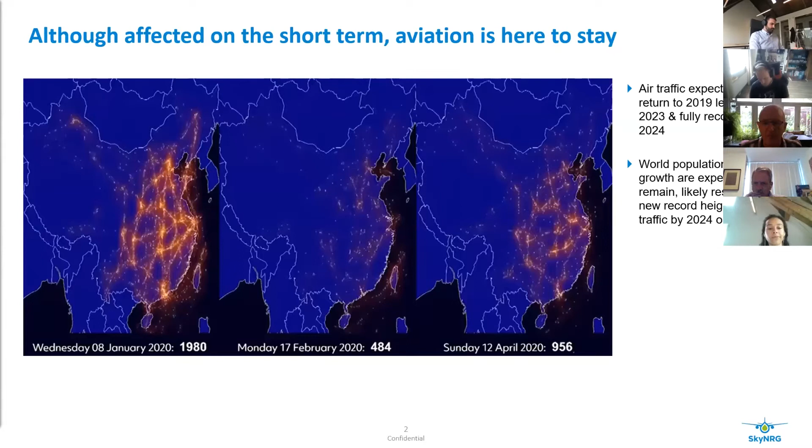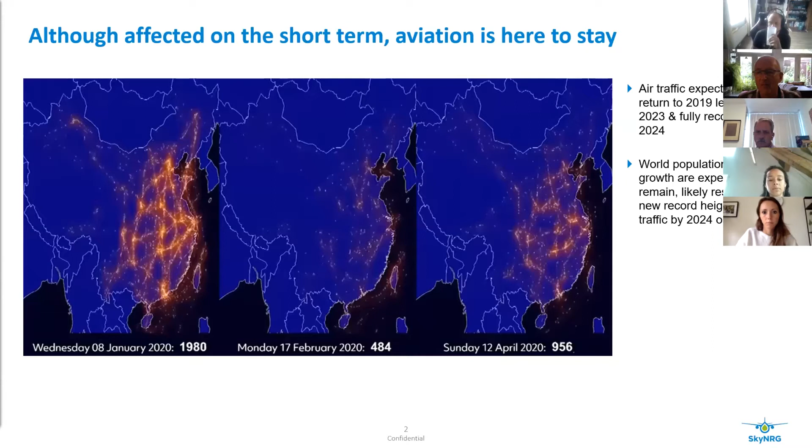Moreover, it's expected that due to the world's population and GDP growth, it will likely result in new record heights in air traffic activity by 2024 and 25. So in other words, yes, aviation is affected in the short term, but it's here to stay in the long term. It is therefore up to us as a society to mitigate those risks of the aviation industry, which is mainly the carbon footprint. Before the COVID outbreak, it was generally known that aviation would continue to grow by 5% per year without timely action, and it would consume 20% of the global carbon budget by 2050.

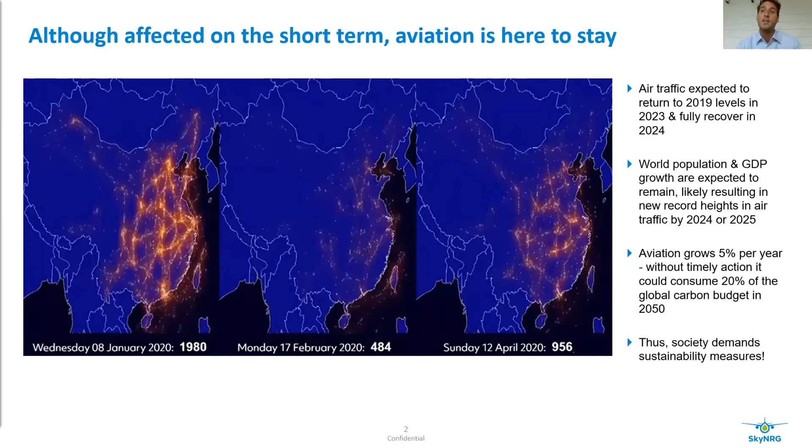To do this, there are several solutions. The first is efficiency improvements, such as newer, more efficient aircraft, but also more efficient air routes. This, however, will reduce total emissions by only 1.5%. It helps, but it's not enough to fully reach the 50% reduction goal. Therefore, it's very important that other solutions, such as sustainable aviation fuel and new technologies, are needed, such as electric flying and hydrogen flying or hybrid.

However, although we as SkyNRG applaud these alternatives because we're in for sustainability, we are also aware that it's not realistic that this will be available on a large commercial scale in the next 20 years.

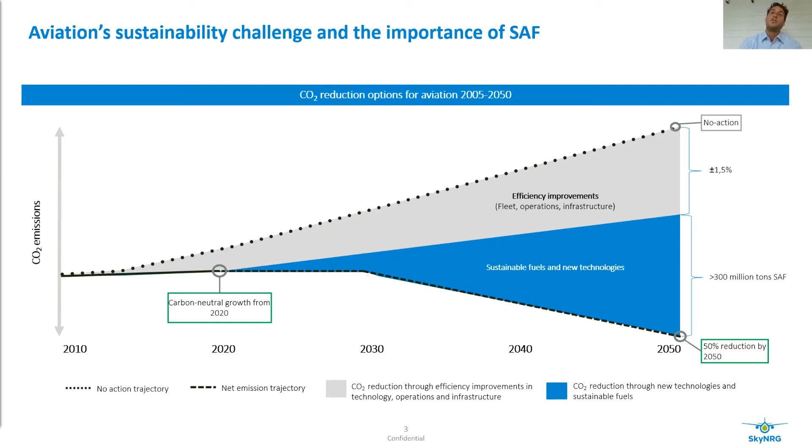So now I've been saying a lot about sustainable aviation fuel till now, but I think it's important, since it's a very important topic, to know what exactly sustainable aviation fuel is. Well, to know what sustainable aviation fuel is, you need to know its enemy, and that's fossil jet.

Fossil jet, in its principle, is taking new hydrocarbons, so that's crude oil, subtracting that from Earth, and emitting new hydrocarbons into the atmosphere.

Sustainable aviation fuel is actually the same, which means that it's a drop-in fuel, such as conventional jet, but the fuel can be used in conventional aircraft. The only difference is that the fuels are made from existing hydrocarbons, such as waste streams, like used cooking oil. These hydrocarbons are recycled, and because of this recycling, this results in an 85% reduction of CO2 emissions, 90% fine particles reduction, and 100% sulfur dioxide reduction.

So two things are important to mention here. First, the feedstock itself is different - instead of crude oil, we use different sustainable feedstocks such as canola oil, used cooking oils, or even municipality waste. The second thing to remember is that the fuel itself is not different. It can be used as a drop-in fuel in conventional aircraft, so the aircraft that exist right now can be used.

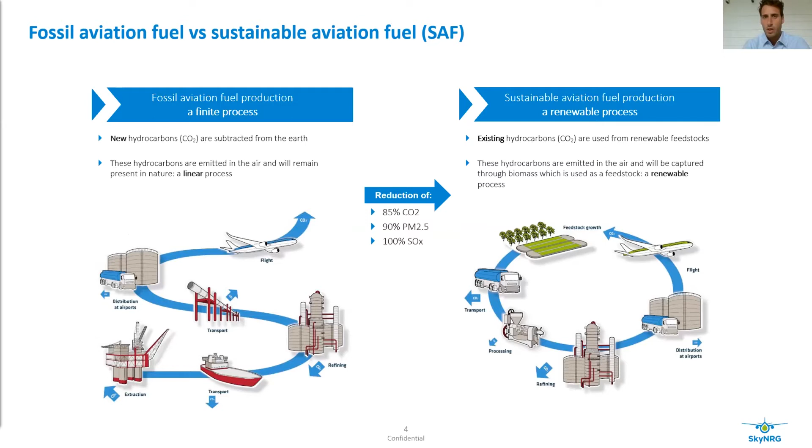So the premium has dropped such that the price today is 2 to 3 times more expensive than conventional fuel, whereas 10 years ago it was 15 times more expensive. So we've been working on that to reduce the premium.

But to reduce the premium, we've also been working on long-term activities - that's creating the SAF supply. So on the short term, we are fulfilling the SAF demand, which results in airlines being able to buy the fuel. But on the other hand, we also create - we are committing ourselves to create new volumes of SAF.

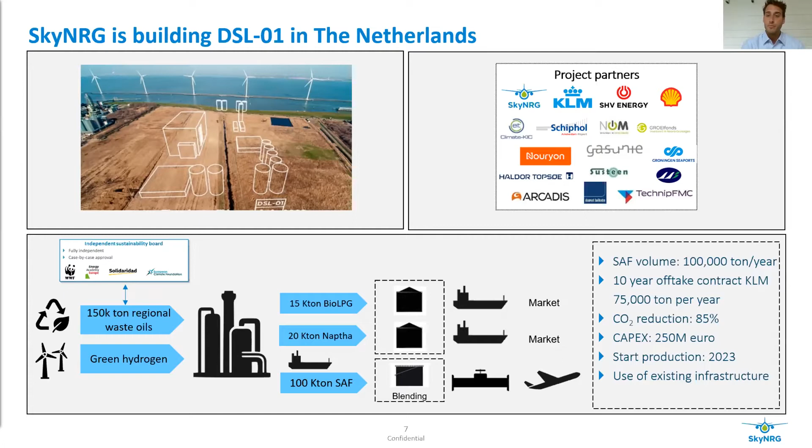Just to mention two other projects which I think it's nice to share with you. For example, we have been working in Sweden. We are committed to focusing on turning black liquor, a byproduct of the kraft pulping process, into jet fuel. For every technology, we look at the region itself and what there's an abundance of, something that's very unique for that region as feedstock. In this case, Sweden has the forest industry.

Another project which makes me personally really excited because it almost sounds like science fiction is turning air into fuels. With this technology, we can literally capture CO2 from the air and turn that into jet fuel. We have been proving that it's possible with a pilot unit of 1,000 liters per day, together with Rotterdam Airport, Schiphol, and the company that developed the technology, Climeworks.

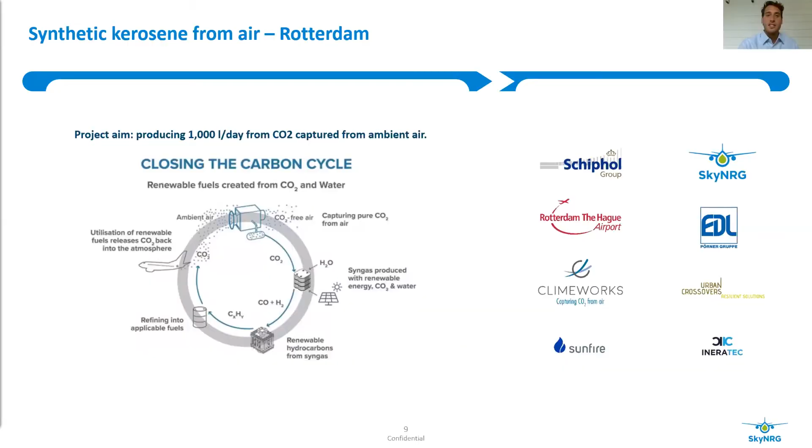So that's actually in a nutshell. These projects are just the tip of the iceberg of our sustainable initiatives. I would love to share more, but I think there's a lack of time. Please reach out if you would like to know more, I'd love to share where I can. But for now, I'm happy to answer any burning questions.

I think maybe it will be nice to turn off the share screen just for one second. Am I visible, Ashley? Sorry, am I visible again? No. Yes, but we still see your desktop. Okay, we can leave it like this for a moment.

Let's go to some questions. Yeah, sure.

Why is 2005 used instead of 1990? Paris always uses 1990 as the starting point. Sorry, can you repeat that? Oh, why is 2005 used instead of 1990? That's a fair question, I think that's comparing apples with pears. 2005 is something that the industry itself, Corsia, uses - that's a different unit, which is related to the Paris Agreement, but as an entity in itself made their own projections into the future.

Thanks a lot, David, for your previous presentation.

There is some overlap, for instance, in the feedstocks that we work with, and more or less in the vision we have when it comes to decarbonizing transport. There's a strong link between GoodFuels and SkyNRG: the founder of GoodFuels, or GOODNRG as our holding is named, is the same founder as of SkyNRG. So there's a lot of overlap in vision and mission.

Maybe to start with the mission statement of GOODNRG as a group. On behalf of GoodFuels and Good Shipping, as the GOODNRG group we have a mission to accelerate the transition to fossil-free transport. We do that by offering a physical product, delivering fuels to transporters, but also by providing a service to companies that don't have their own fleet but are responsible for emissions by transporting their products and goods.

On the one hand we have GoodFuels. The mission of GoodFuels is to accelerate the transition to fossil-free transport by co-developing and commercializing truly sustainable alternatives for fossil fuels. GoodFuels is really about supplying physical products. On the other hand, we have the Good Shipping program, with the same mission to accelerate the transition to fossil-free transport, but by empowering cargo owners to switch to a sustainable fuel and together change the industry. I'll come back to that a bit later.

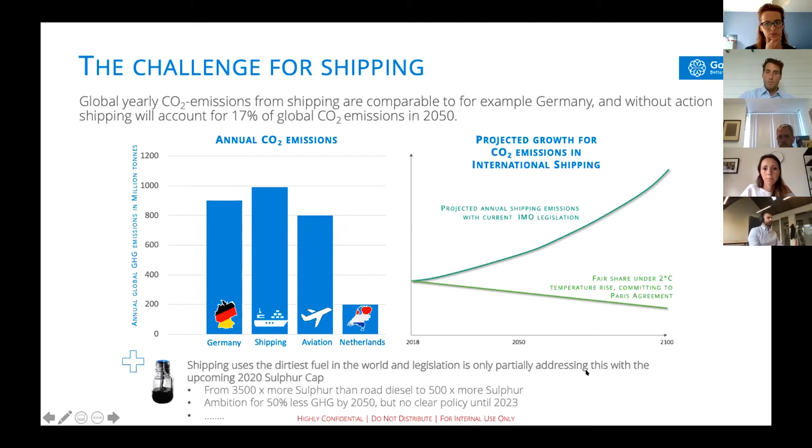GoodFuels really tries to decarbonize the shipping industry by offering biofuels. We believe at this moment biofuels are the best solution. They can be used as a drop-in solution, meaning the vessel does not need to adjust its engine settings or infrastructure. It can be treated in a similar way as fossil bunkers.

Here you see the rationale for choosing biofuels at this moment as the most feasible option. Greenhouse gas emissions can be reduced by 50 up to 90%, and the feedstocks and biofuels that GoodFuels works with are between 80 and 90%.

Other examples are, for instance, speed optimization, which is typically used, really the result of the last economic crisis, whereby a lot of container vessels implemented slow steaming, reducing their speed. That requires less fuel consumption, and that also enables vessel owners to reduce their greenhouse gas emissions. Yet, as soon as the economy attracts again, you see the reverse effect occurs.

Another example is vessel size. You see now that there are already container vessels — I think it was in the news yesterday that one of the biggest container vessels in the world was calling port in Rotterdam. It carried up to 24,000 containers, more or less equal to 4 football fields in a row. But for vessel size too, we are reaching more or less our limits there.

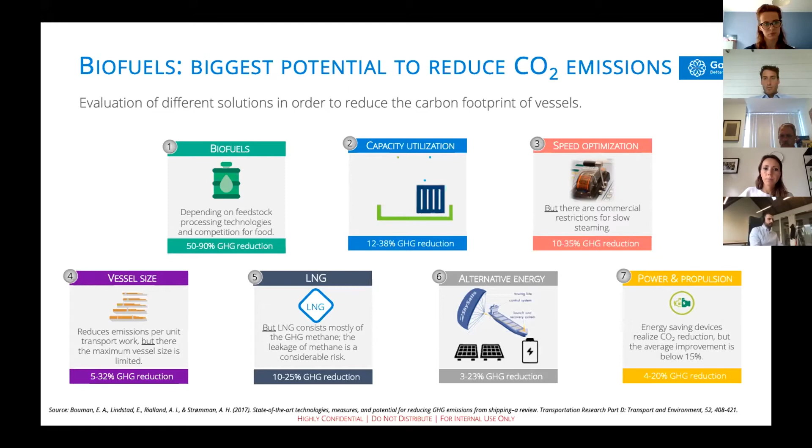GoodFuels is offering different products, and I don't want to bother you with all the technical requirements of this fuel, but I think it's important to see that we do 2 things: we offer different types of biofuels, but we offer blends as well. Offering blends is often used to make the step, both from a commercial as well as a technical point of view, a bit less challenging.

So you see in our portfolio, it's really biofuels at the moment, yet we also focus on other solutions on the longer term. But before I go into that, I want to provide you with some examples of the segments in which we are active. So first I start with dredging and offshore.

I already mentioned at the beginning that tenders is an example on which we are quite active. So we help our customers win tenders. For instance, if there's a target or a requirement on carbon reduction, they can use a drop-in biofuel in order to fulfill that requirement. And very often a shipping company or client gets rewarded with a discount in the tender for that, meaning they are more likely to win the tender.

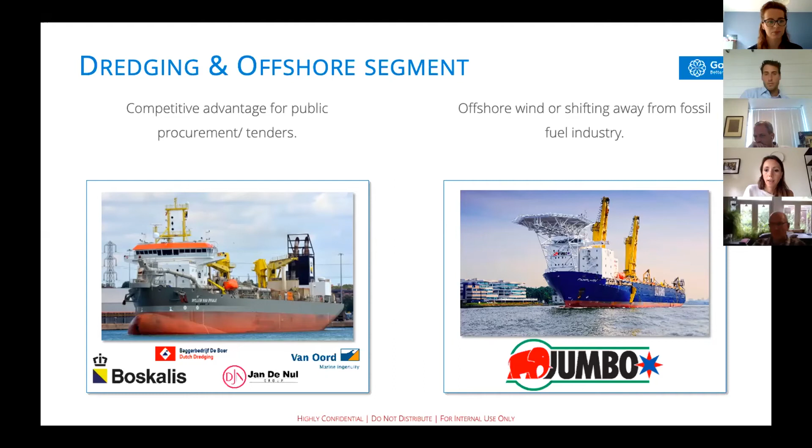Jumbo is also a very nice example, a customer with whom we started the first deliveries last year. The first delivery was very nice because Jumbo used biofuels for a decommissioning project. Symbolically, that is great because it means a fossil platform is being decommissioned by a vessel using biofuels. So that's the energy transition to the fullest, I think.

Other customers are, for instance, port services and governments. A lot of players in the ports have a very important role when it comes to providing the right example. We have the Dutch pilots, we have port fleets running on biofuels. We also have government-related organizations — think about the Navy or the Dutch Coast Guard. Especially the Navy has a very interesting reason to use biofuels: the strategic ambition to become less dependent on fossil fuels. So it's more a political rationale, but not less important, I think.

Then the Good Shipping Program, which I already told a bit about at the beginning — it means the Good Shipping Program is offering the service of decarbonization. Typical customers are IKEA, Dopper, Tony's Chocolonely, and Mail Unie. These are customers that are willing to decarbonize their ocean freight.

They pay basically for the premium of the biofuels, which enables us to deliver the biofuels at fossil parity to the ship owners. So it's a win-win situation: the cargo owner gets back control of their own emissions, whereas previously it was outside their own scope of influence, and the ship owner gets the biofuels at fossil parity. So from a commercial point of view, there's no reason why they wouldn't want to do it.

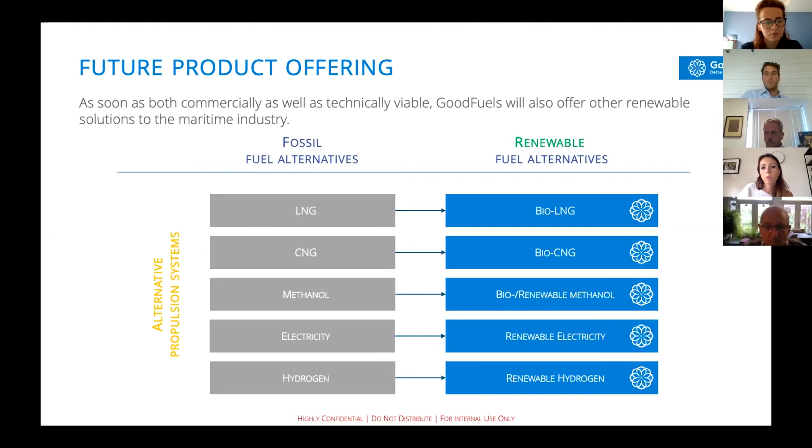But also other alternatives, biomethanol, bioethanol, renewable hydrogen are already alternatives and solutions we are actively looking into. For us, the most important reason whether or not to offer these solutions is the commercial viability in the market.

And then in terms of feedstocks, now we mainly work with waste oils. So in terms of sustainability, it should really be waste streams that cannot be used for anything else. But on the longer term, we also look into other feedstocks, which can be, for instance, solid biomass instead of liquid biomass only, lignin-based solutions, but also plastic and waste-based.

And in terms of sustainability, you could say it's then no longer a bio feedstock that you use. But if you use, for instance, plastics which cannot be recycled anymore, so the only option would be to just burn it or use it for landfill, then it's better to convert the waste into a biofuel, because at least you get transportation and energy in return.

So in that sense, we always work via the cascade principle, meaning that we always look for a feedstock, a waste stream, for the highest quality application possible. If that means that at a certain moment it would be interesting to produce a renewable fuel out of a plastic bottle, for instance, this should be a continuous evaluation of whether or not the bottle can be recycled instead.

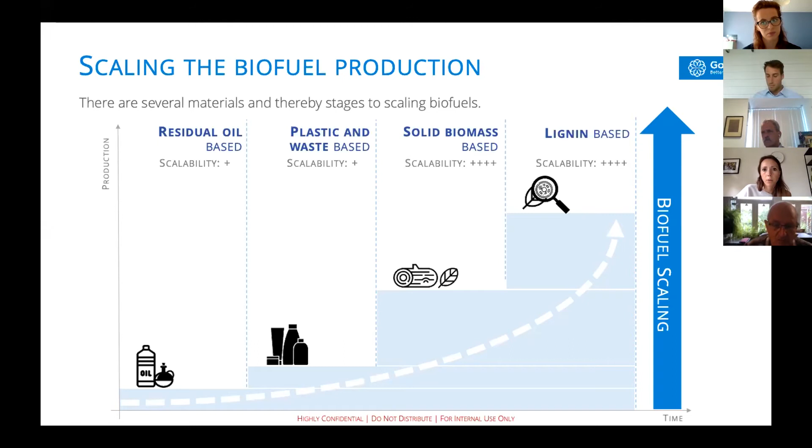And that was my presentation for now. So thank you all for listening. And probably there will be some questions, so happy to answer these.

Thank you, Isabel, for your presentation. Very clear, in my opinion. We have two questions, and the first was about whether hydrogen will be an alternative. But I think it's already quite described in one of your last slides. Yeah.

Another question: all the other industries are also looking at these residual materials for heating purposes. Will there be enough for the production of biofuels? Yeah, so that is a very good question, because competition about feedstock is something indeed which is very often addressed. To give you an idea, there is an overview of different studies on the availability of biomass as a feedstock to produce, for instance, biofuels or other energy sources. And if you look at that study, 15 out of 16 studies confirm that there's enough biomass waste streams available to fulfill the need of the whole transport sector.

And it is important to emphasize the whole transport sector, because what we really believe as GoodFuels is that, for instance, for passenger cars or other means of transportation, but also smaller vessels, these can be electrified, or the options for other sustainable alternatives are already there. That means biofuels should only be allocated to the transport segments who need it the most - in this case, on the longer term, aviation and shipping. So yes, you can use sustainable feedstocks to produce energy in other ways too, but it's much more difficult to have a vessel running on solar cells or wind energy, because you have a lot more flexibility when it comes to producing energy elsewhere than having a vessel sailing in the middle of the ocean being dependent on solar energy, for instance.

Up till now, we have been traveling more than ever before. It took us about 12,000 years to get to 1 billion people on this planet, but only a few hundred years to get to the 7 billion people we have now. And these 7 billion people travel a lot, so our city transport systems are completely clogged, the highways are very dense, and the huge amount of planes in the air is really breaking it up. And what do we do when we see that the highway is clogged?

Luckily not really in the Netherlands, but as we all know, in America we just build the next lane next to it, giving you these awful pictures, if you ask me. Not only on the highway perspective, but also if you take a close look at our railway systems, they're often functioning on techniques that are 50, 60, 70 years old. And if a minor component breaks down, the whole system can come to a full stop, causing big problems in rush hours, with people getting stuck at stations.

If we look at newer modes of transportation, aviation, we see that the aviation industry is really growing, doubling about every 15 years, at least that's what we've seen so far. We're not against aviation, but we believe our mode of transportation, the Hyperloop, can exist really well alongside it. So that brings me to the question: what is Hyperloop and how are we going to do that?

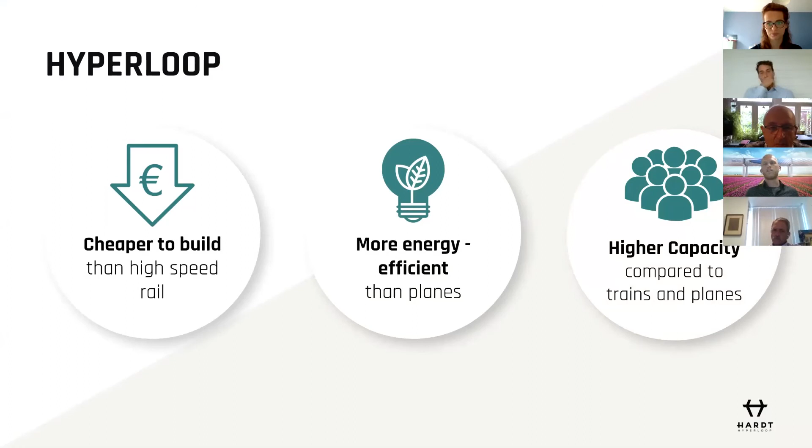We believe Hyperloop is a cheap to build transportation system than high speed railway. It's definitely more energy efficient than taking a plane, and it has an overall higher system capacity compared to other modes of transportation for longer distances.

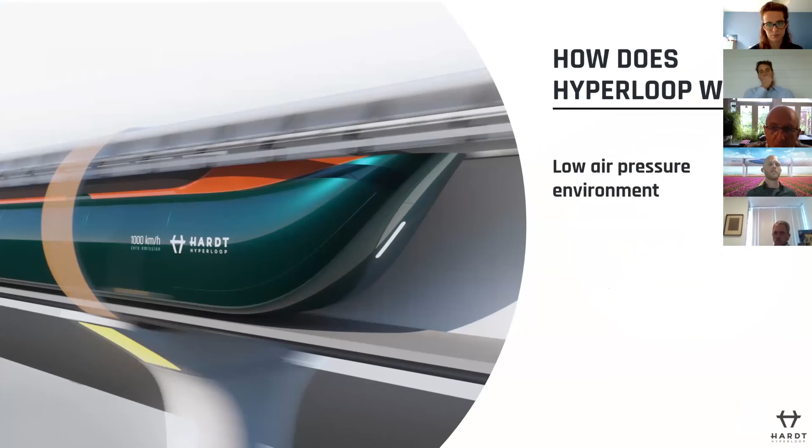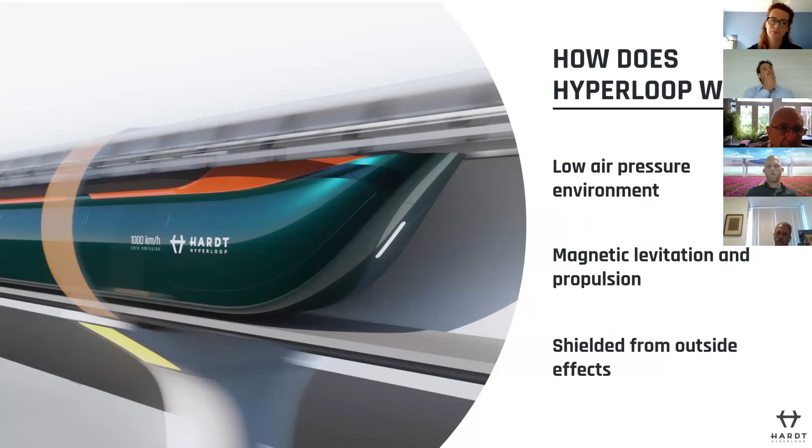The Hyperloop technology is about three parts. We are in a low pressure environment, making sure we don't have much air resistance in the tube itself. We use magnetic levitation to reduce the resistance on the rail we travel on. And we are shielded from the outside environment, meaning we don't get interference from storms, weather, rain, etc. The Hyperloop technology is visualized in this picture.

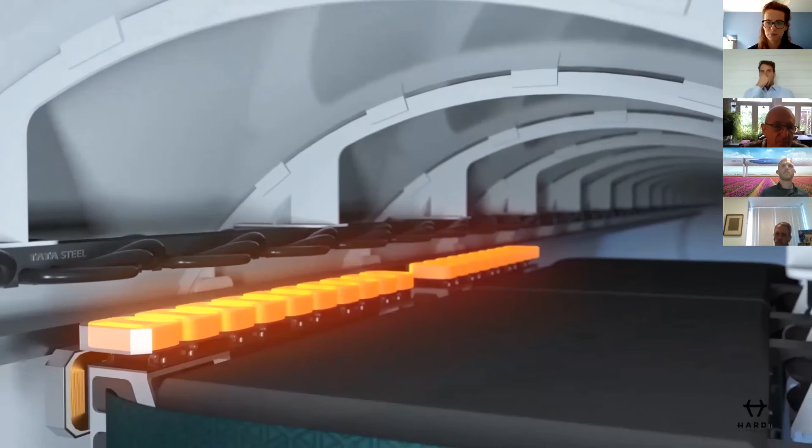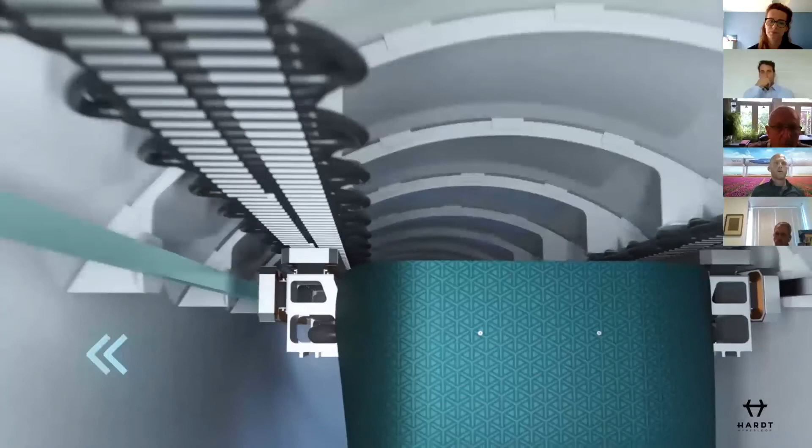What we see here is that the vehicles are lifted with magnets attached to them, going up to the rails. The motor of the vehicle is actually on the rails itself, so the motor in the tube makes the vehicle move. It's kept in place by two guidance rails on the left and right side, keeping the vehicle in place automatically. And we have a patented switch technology, making sure these side guide beams also allow the vehicle to switch without any movable components. That's really new in the Hyperloop industry.

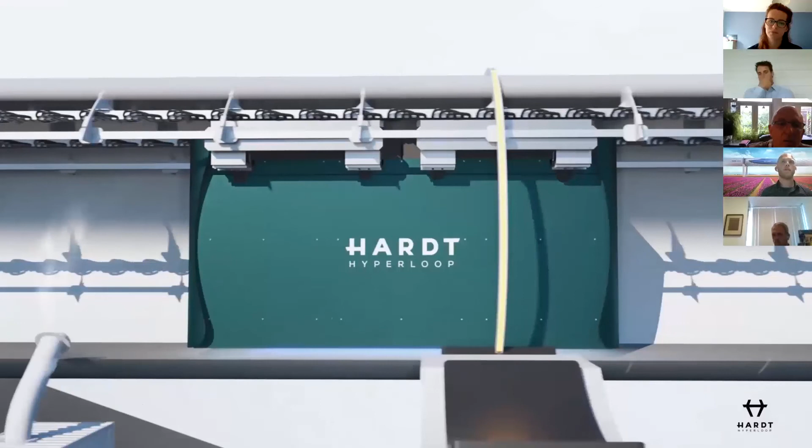So if we combine these technologies as I was explaining, we can travel up to the 1,000 kilometers per hour that we promised we will do.

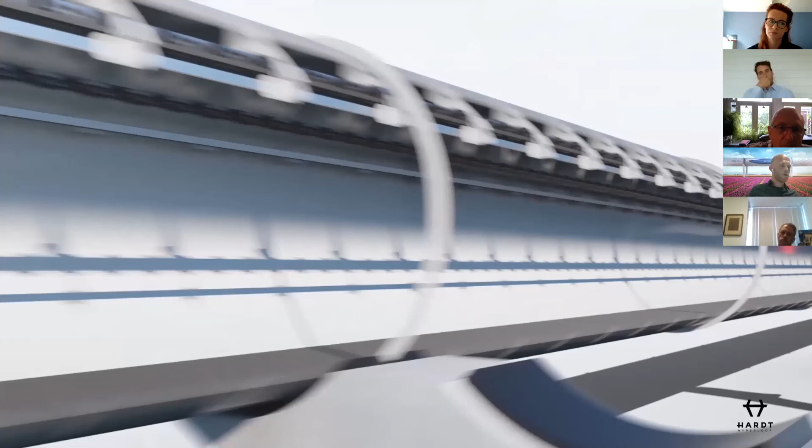That's definitely not going to happen tomorrow, because a lot of things need to be done before we're able to do that. Most important is, of course, the technology that we have to prove, and we're happy that we've proven our technology up to levitation and the switch. Only high speed is yet to be tested, and that's what we're going to use our European High Speed Center in Groningen for. Construction of that will start this summer.

We are going to need a regulatory framework, a set of norms and guidelines that allow us, or any other Hyperloop party, a government or whoever operates it, to operate Hyperloop. We need public adoption, very important - that's something you always see when new transportation modes or new things happen in general. Because if you don't take your stakeholders with you, they'll probably be against what you're doing.

And of course we have to develop the routes we're going to travel on first. This is basically a trade-off between a good business case and, of course, the techniques and the pilots that we can also prove on this route.

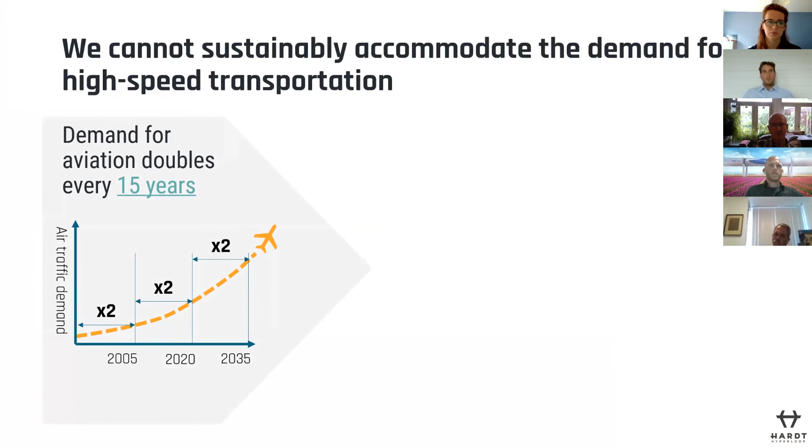We believe that if we look at current modes of transportation over longer distances, it's not really feasible to keep working only with aviation or railway industry, because if you look at the amount of CO2 emitted by airplanes, we believe it will be higher than the promises of Paris. I'm quite happy that from the previous presentation, perhaps there's a solution in that.

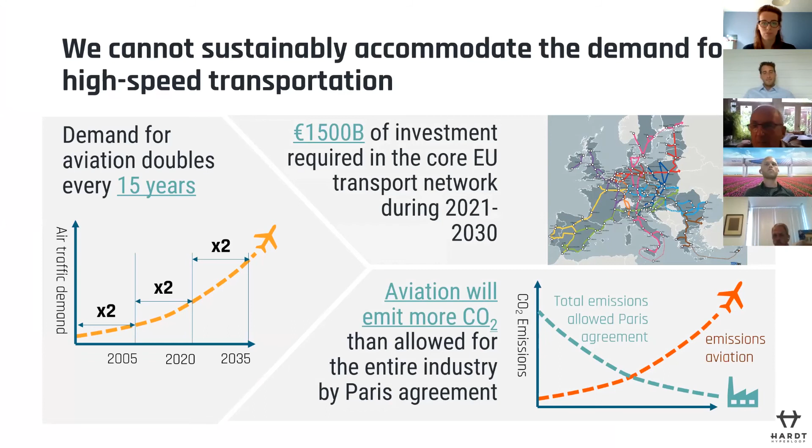But if you look at the railway industry and the amount of money that's going to be invested in that over the upcoming 10 years, that's such a huge amount of money. We really believe it can be done cheaper, all combined in the Hyperloop technology, which is basically combining the best of both worlds, if you ask me.

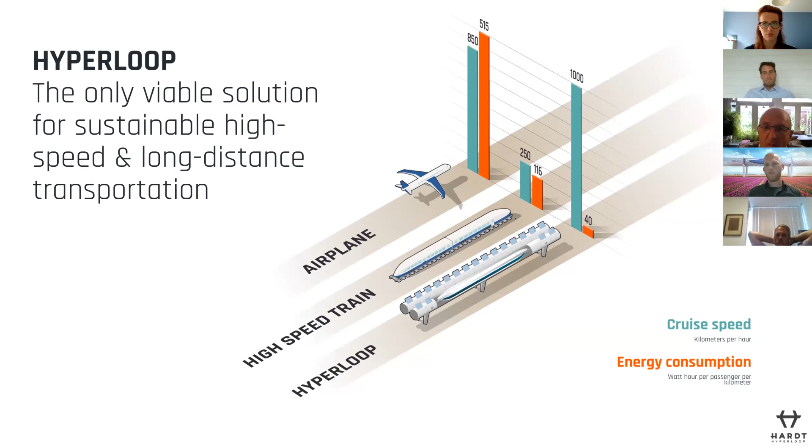So what would it look like if it was up to us? We say that we can build a European Hyperloop network for about 14 billion annual profit, and reducing a significant amount of CO2 emissions.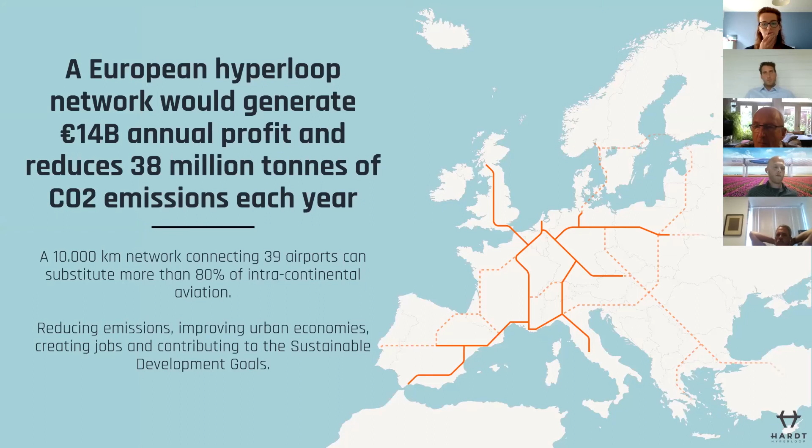We believe in that because our technology is mainly based on electric propulsion. On the other hand, we also know that our construction and materials will produce a lot of CO2, for example the steel we'll need for the tubes. That's why we're looking into more sustainable tube options, like fiberglass, or anything else we can investigate to reduce that.

In order to get to that full network, we believe it's very important to start with a small pilot, because obviously the European Hyperloop network will not be there at once. That's why we're scaling down to a corridor, or to many corridors, that we're focusing on now, starting with a pilot study we are currently working on.

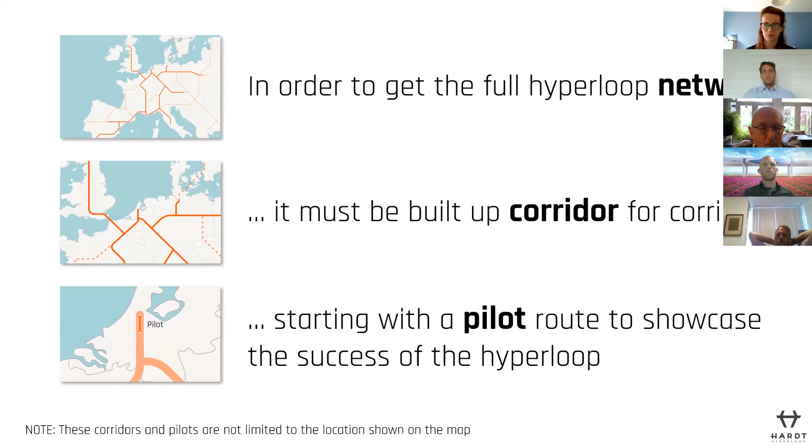So basically 3 things will come together in that pilot study. That's the product development - after Groningen, we don't hope, we are sure we'll reach TRL 7. The standardization and regulation - an important collaboration with the national government and institutes that make sure Hyperloop transportation is done in a safe and proper manner. And of course the market developments, because if you have a nice tube from A to B but nothing to transport in it, then you didn't choose the right pilot route.

If we look worldwide, it's quite interesting to see that we're not the only one working on Hyperloop, giving us the assurance that we're not working on something basically non-existing or just a boy's dream. We are quite happy to see so many other companies also working together to make sure this technique will succeed.

Something we're really focusing on, and that's really important to us, is that we set a European standard. We've chosen our own technology, of course, partly because we want to be the European standard, but also because we are the most advanced when it comes to Hyperloop technology in Europe. The most important reason, though, is that we don't want to see what happens in railway transportation, where if you cross a border between 2 member states of the European Union, you get different signaling systems, different overhead wirings, even different gauges.

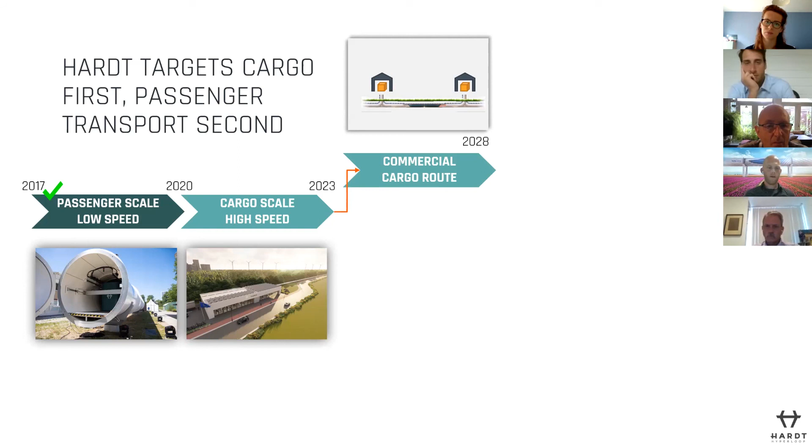So we have the Hyperloop technology that we split, and this is something new you'll be hearing more about shortly. We'll be having the cargo loop technology that will expand into a European-wide cargo loop network. As soon as we have a stable and proven technology on the cargo route, we will also start developing the passenger route, and then the high-speed passenger Hyperloop network I was discussing before.

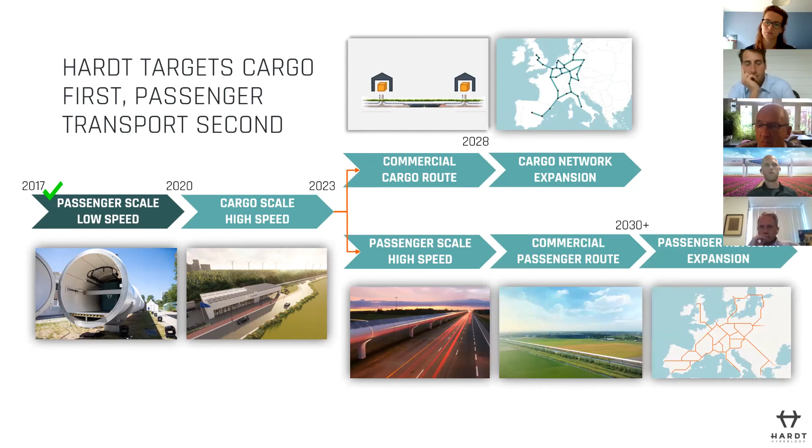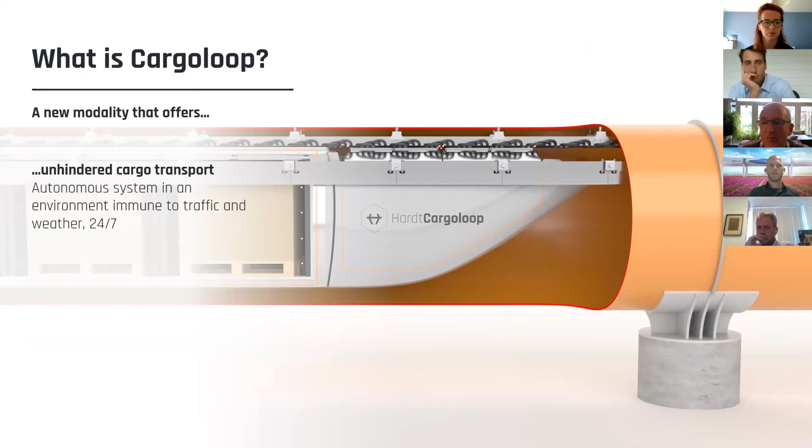So we dive a little bit more into the cargo loop, because that's my project. The cargo loop is a type of Hyperloop, but in a somewhat smaller tube, using the same technology as Hyperloop, but instead of transporting people, it will be transporting goods.

Not every type of good is going to be suitable for the cargo loop. We don't want to transport goods like grain or oil or whatever - the quite cheap type of transport. We're really focusing on time-sensitive and perishable cargoes, for example also e-commerce.

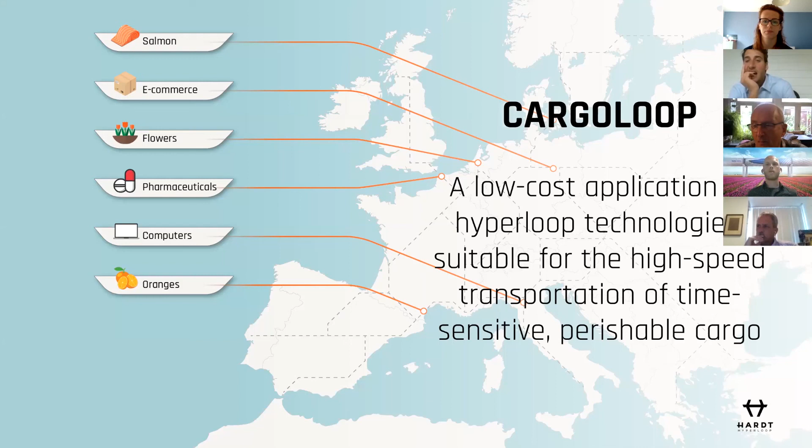So the market in which you order something before 5 o'clock and want to have it the next day is causing huge pressure on the current logistic systems, and that's typically a market we want to take a look into.

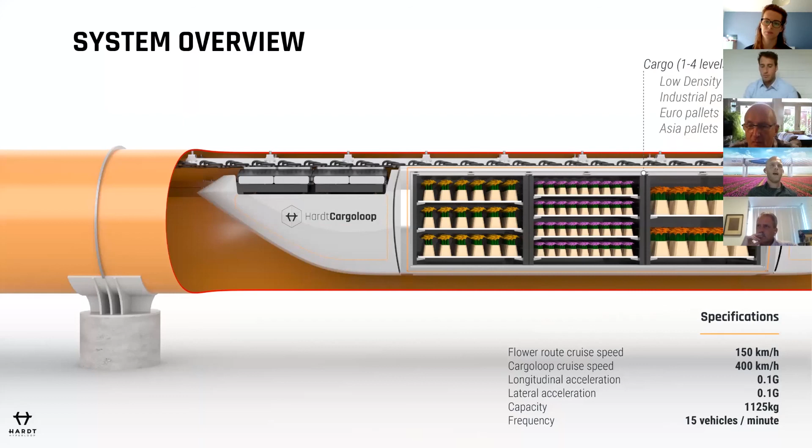So we're currently designing this cargo loop system. The specifications of the system are visible here on the screen, and currently we're working really hard to make this happen. And therefore, the test center in Groningen is also key to let it succeed.

We have had many successes so far that I'm really, really proud of, because it was mainly due to the team that had been working before I joined the company. So it's a big applause to them.

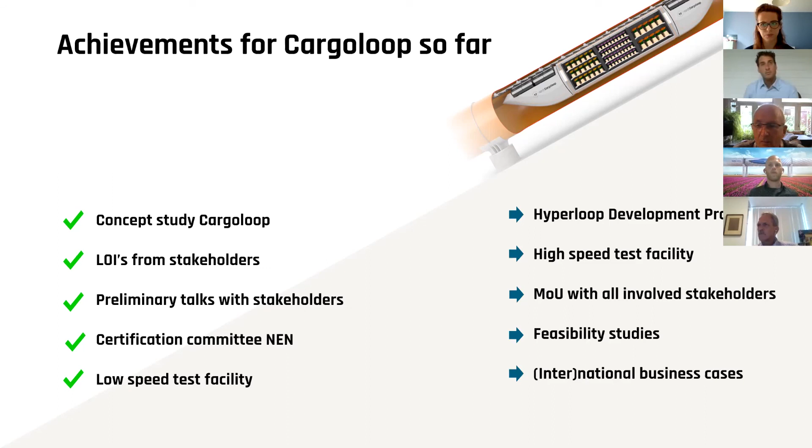And then there's of course many challenges that we will be facing in the upcoming months and years as well to make this very nice dream come true. But we're very confident in making that happen. So that's why we say that the sustainable connected world will start with the Cargoloop. And that was my last slide.